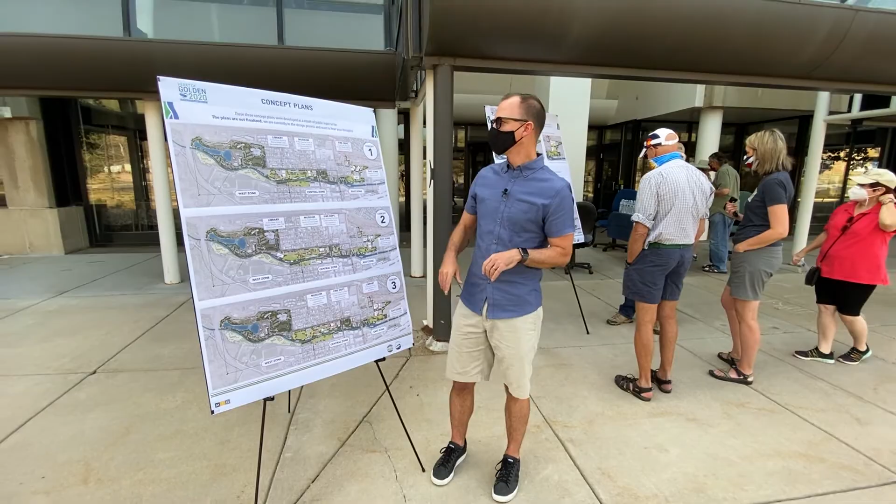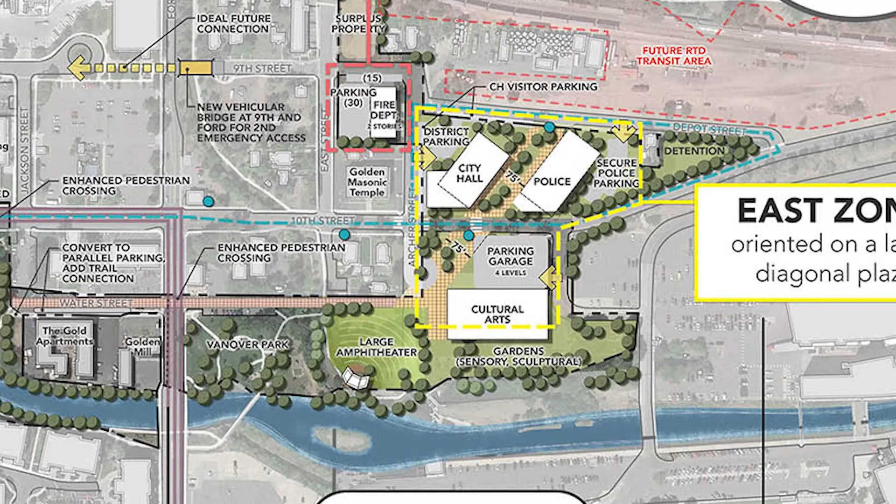We have three high-level concepts here. The first concept focuses on spreading some of the key facilities throughout the corridor. It still creates a pretty large green space, central to the corridor, where we have City Hall and the library today, but has new facilities speckled throughout. There's a large concentration at the east end of the corridor complemented by a large plaza and amphitheater.

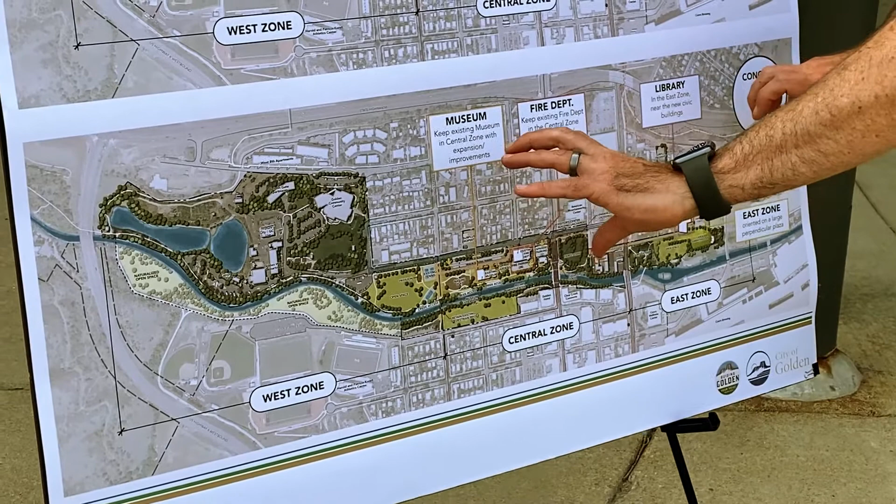The second concept doesn't spread the facilities as much throughout the corridor, so there's a smaller footprint of open space, but it shifts to the west a bit. Our final concept, concept 3, again spreads the facilities throughout the corridor and creates a series of smaller green spaces along Clear Creek rather than one large green space.

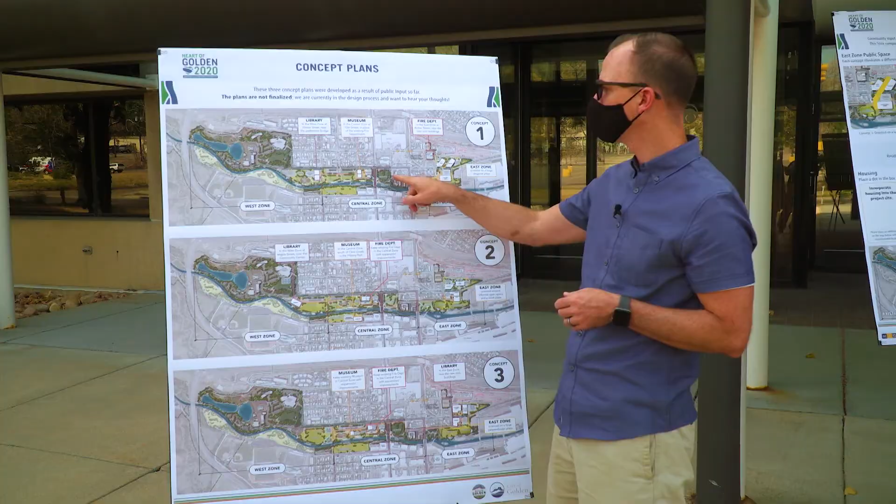If you go to Guiding Golden, you'll be able to say generally which of these configurations makes the most sense to you, but then also fine tune that. You can say you like concept 1 generally, but think the library should be on the other side of the nature play area, or that this green space should be larger, or we should think about a different connection between Parfet Park and the new green spaces we're creating.

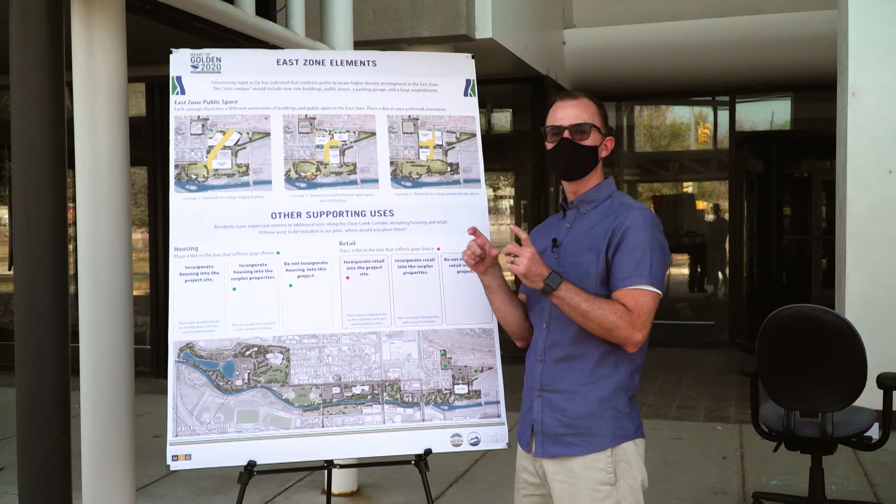This board is doing a deep dive on the actual position of buildings, orientation of those buildings, and the remaining spaces created as a result—plaza spaces, landscaped areas, and the open space along the creek.

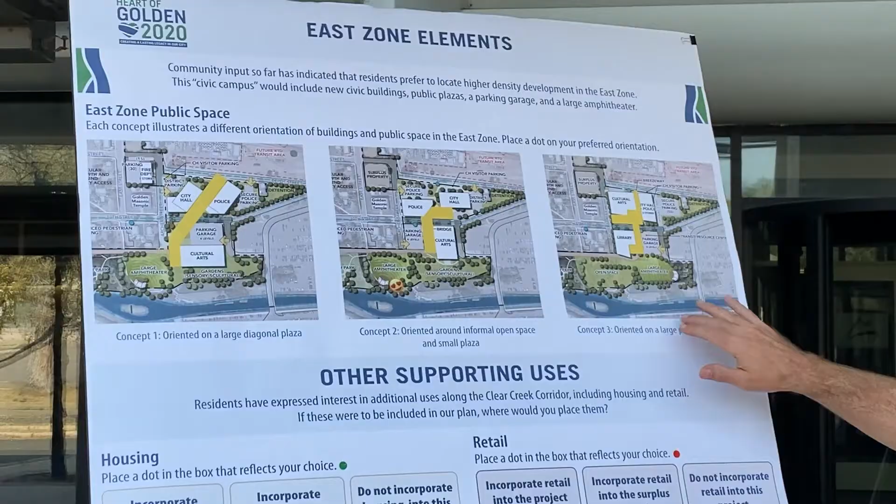Concepts 1, 2, and 3 all have different orientations of the buildings. They move the pieces around, which result in this big yellow area being the resulting plaza space that connects those spaces. We have a diagonal plaza in concept 1, an L-shaped plaza with a parking garage flanking it in concept 2, and concept 3 has this oddly shaped plaza that creates a lot of interesting connections over to Archer, potentially to 10th Street, and potential redevelopment to the west.

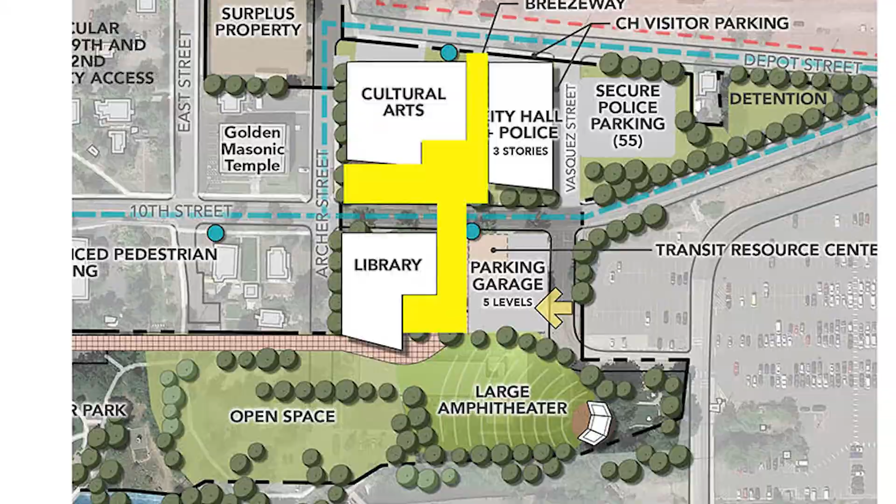The bottom half of the board talks about other uses that might be complementary to the civic uses. We've heard a lot of different things through the process, all the way back to visioning, about thinking that a small amount of retail and housing, maybe affordable housing, should be part of the mix, while others feel strongly it shouldn't be. We'd love to hear more on that.

We're breaking it into 3 different options for housing and retail. For housing, could it be incorporated into the site right along the creek with some of the civic uses? What are some opportunities for that? It would probably have to be a mixed-use development of some sort.

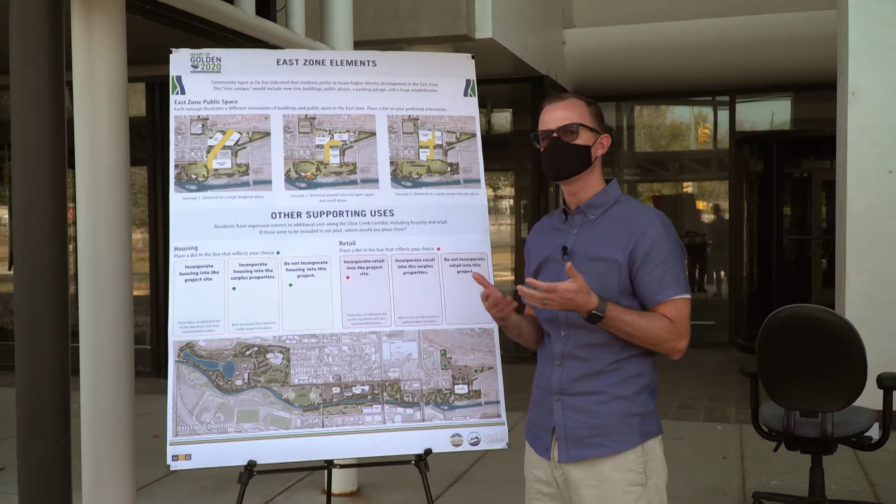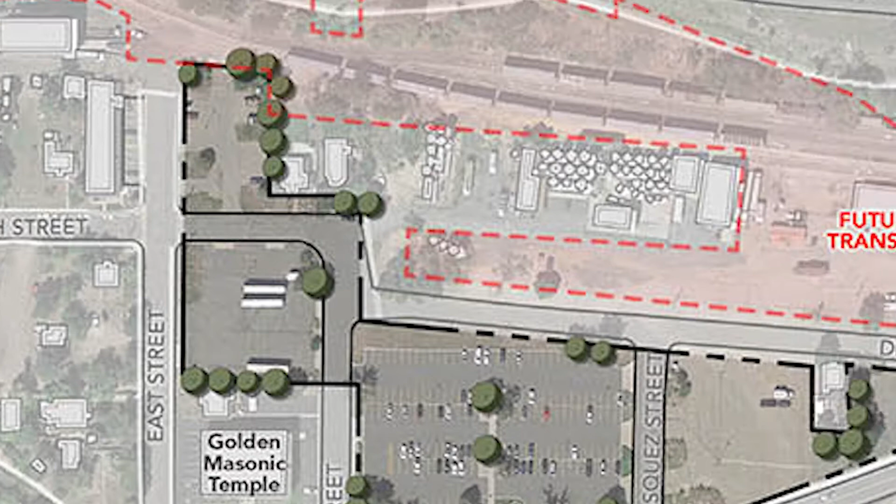The second option would be the surplus properties—examples would be north of the Masonic Temple, or maybe over near where the future RTD station would go if it were extended this far.

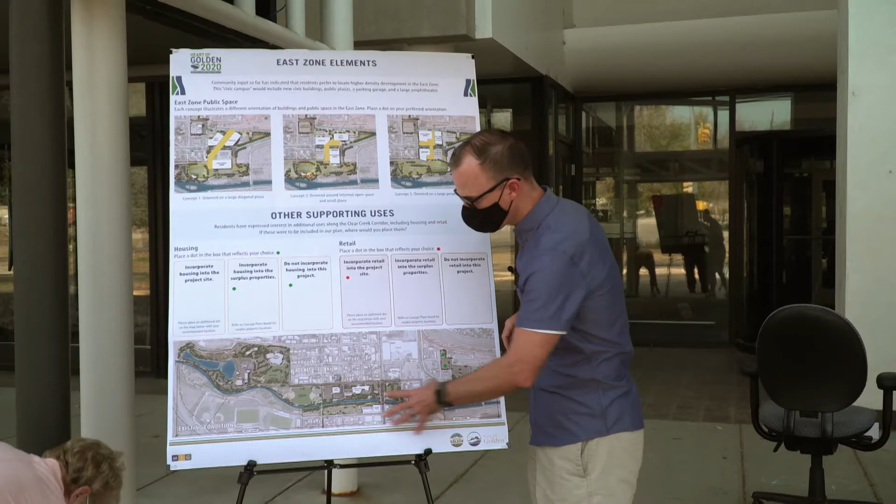Similarly, retail is asking the same 2 questions, but there's an option to say you do not think housing or retail should be incorporated into this overall concept at all. Those options are definitely there. If you do have specific locations, you can identify those with dots on the map.

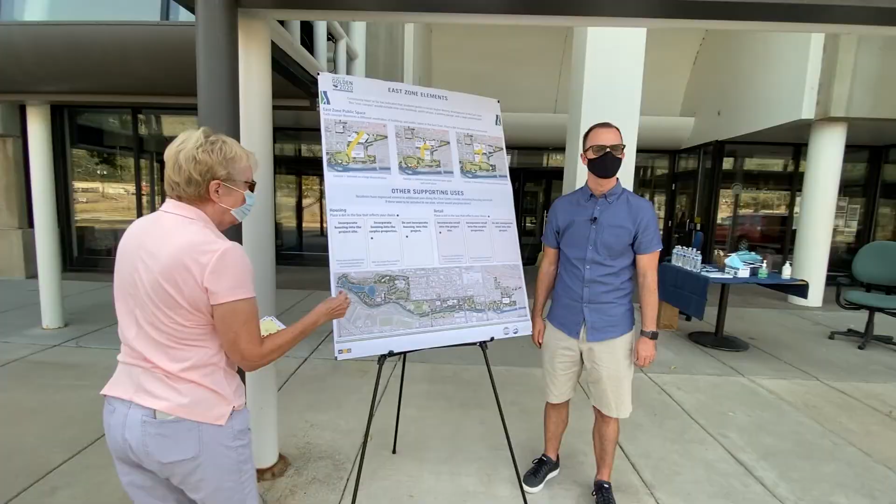Go ahead and put your dot there. That's why we're doing it. Nice job, you got the overview.

This board is talking about this east end and a focus on what happens when this building goes away that we're standing in front of. Right now we have one large building surrounded by a lot of large parking lots.

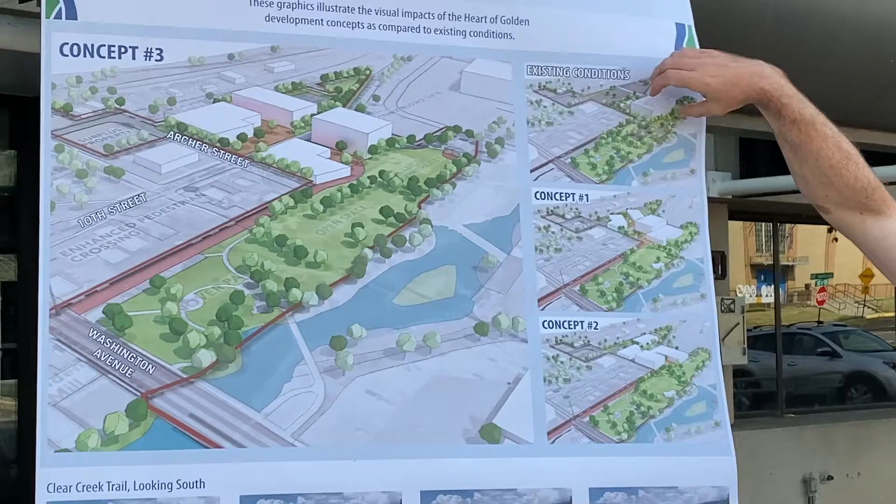What we'd like to do is think about how multiple civic facilities could lay across the site. This is the existing condition in the upper right—one big building, lots of surface parking lots around, not a lot of connection between the different spaces. A lot of people know the building was acquired by the city, but there's quite a bit of land around it. So how do we use that most effectively?

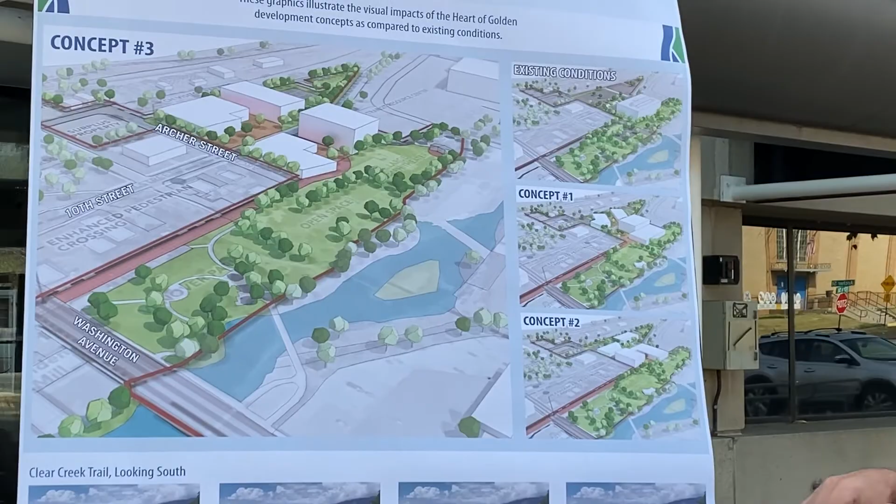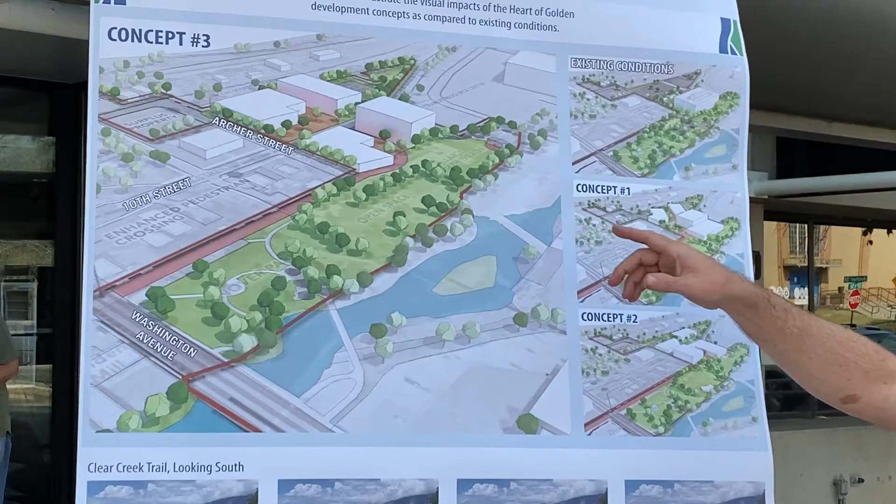What are the impacts of putting a lot of facilities down on this end to preserve open space in the middle? There are some trade-offs we're exploring. One is simply the number of buildings—this is concept 3 blown up here, and we also have concept 1 and concept 2. But also the height of the buildings, and beginning to think about the views.

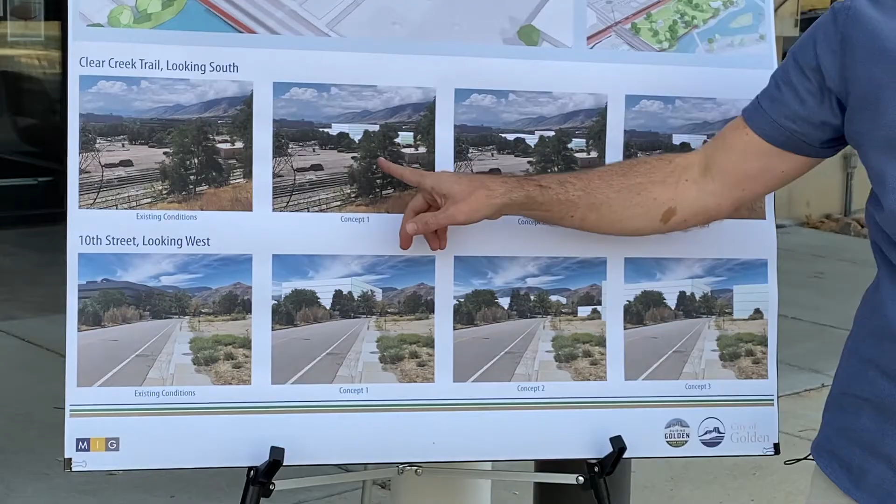This isn't meant to convey architecture at all—if we were to use the buildings to accommodate civic uses, how much space would that take up? We call these bulk and massing diagrams. Could there be a chamfered corner, nice glass, things like that? But this begins to show how it impacts the landscape across the different concepts.

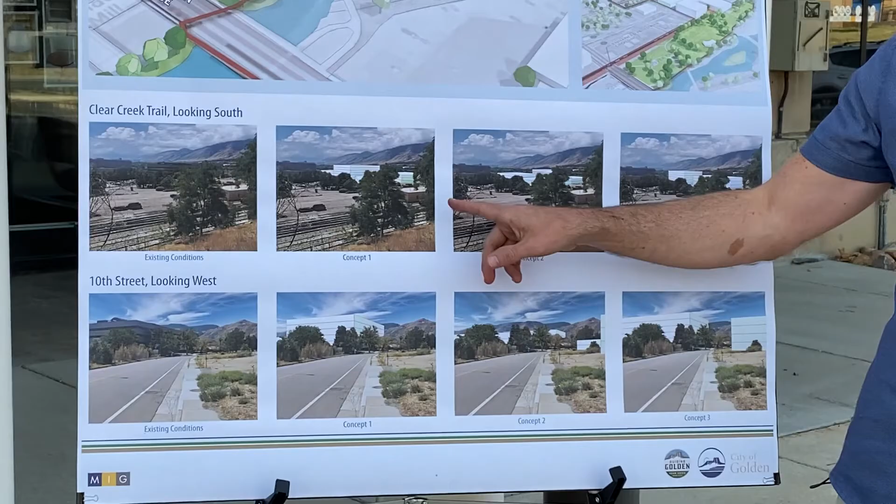From left to right, we have the existing conditions with concepts 1, 2, and 3. Those align top to bottom, as well as align with concepts 1, 2, and 3 up here on the top of the board.